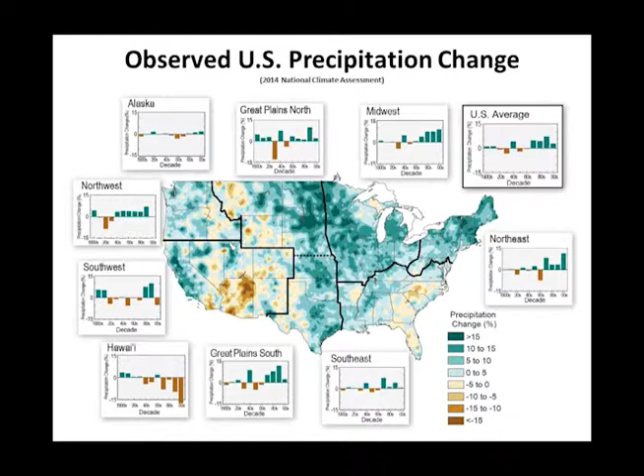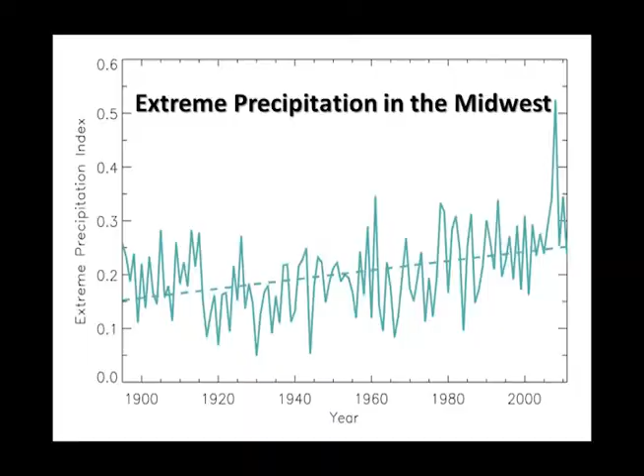The combined sewer problem is compounded by the increased amounts of precipitation that we've been seeing in many parts of this region during recent years, and the increased frequency of extreme precipitation events, especially here in the Midwest. These rainfall trends are well documented in the National Climate Assessment, and the combined sewer overflows that follow extreme precipitation events are often chronicled in the press.

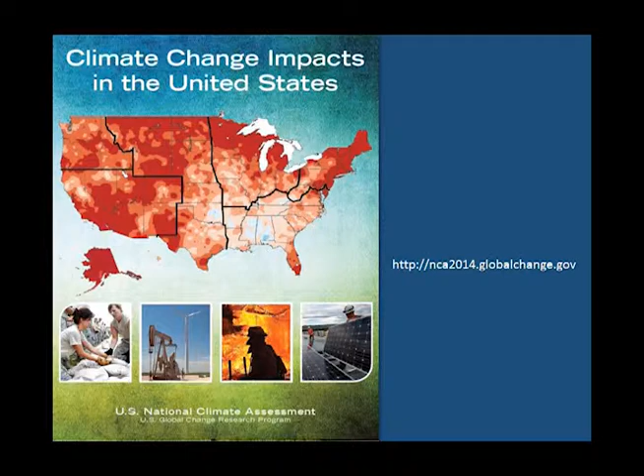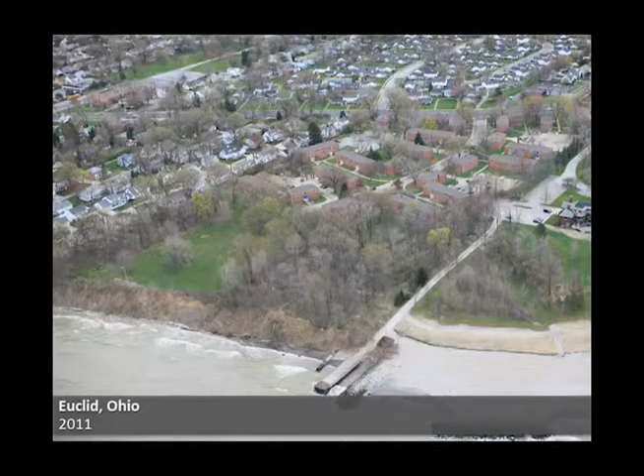Reducing combined sewer overflows is one of my top priorities, and I'm very pleased to be able to report that during the time that I've been regional administrator, we've been able to work successfully with our state and municipal partners to finalize consent decrees with 9 sanitary districts that serve CSO communities in the Great Lakes region, including Toledo, Ohio, where the city is implementing measures that will prevent the release of over 600 million gallons of untreated sewage into Lake Erie each year. In 2011, we finalized CSO consent decrees with Euclid, Ohio, and Cleveland.

The Northeast Ohio Regional Sewer District consent decree was one of the first in the country to require the use of green infrastructure, along with conventional gray infrastructure, and it will prevent nearly 5 billion gallons of untreated sewage from discharging into Lake Erie each year.

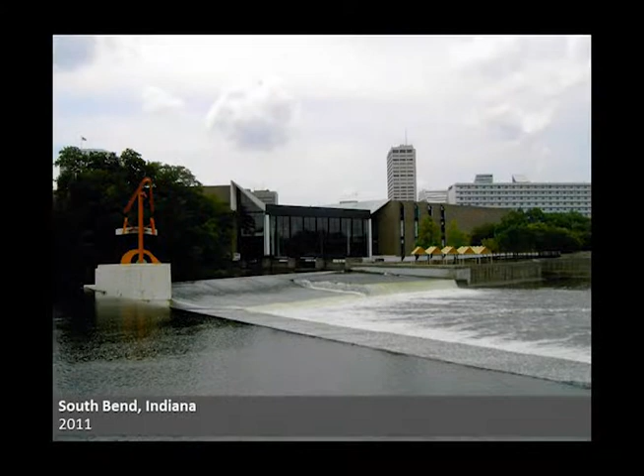In 2011, we also finalized a consent decree with South Bend, Indiana, which was followed in 2012 by a consent decree with Elkhart, Indiana, and then just last year with a consent decree with Mishawaka, Indiana, which, like South Bend and Elkhart, is located on the St. Joseph River, a major Lake Michigan tributary. There's the St. Joseph River. These three consent decrees will together eliminate an annual discharge of over 1 billion gallons of raw sewage.

In 2014, we also finalized a consent decree with the city of Akron, Ohio, which will prevent over 2 billion gallons of untreated sewage from reaching the Cuyahoga River and Lake Erie each year. And last year, we also finalized consent decrees with Lima, Ohio, and the Metropolitan Water Reclamation District of Chicago.

Here in Chicago, our CSO settlement will prevent over 200 million pounds of pollutants from entering area waterways each year. And the settlement requires the district to rapidly expand the reservoir system used to hold untreated stormwater. In fact, the consent decree requires MWRD to triple existing storage capacity for untreated water within 3 years.

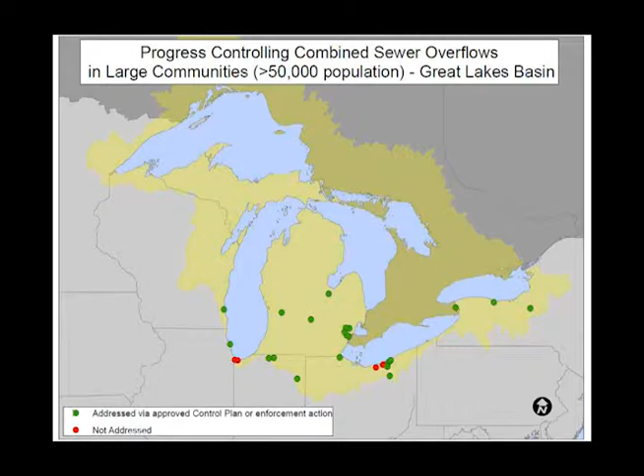That being said, there are several combined sewer communities in Region 5 where we're still working to get a consent decree in place, and most of them are in the Great Lakes Basin. These communities are highlighted by the red dots on this map. They're Gary and Hammond, Indiana, and Elyria and Lakewood, Ohio.

We're committed to finalizing consent decrees with these communities by 2016, and we'll continue to monitor implementation of all of our existing CSO consent decrees to ensure timely completion of the projects and operational measures set out in the long-term control plans that have been approved in connection with those decrees.

Green infrastructure measures, such as permeable paving and rain gardens, capture and store rain where it falls, instead of allowing stormwater to drain into overtaxed sewer systems. And because green infrastructure sometimes turns out to be more cost-effective than gray infrastructure, our recent CSO consent decrees allow communities to substitute green infrastructure for gray infrastructure projects when the community can show that green infrastructure is at least as effective as a gray stormwater management measure.

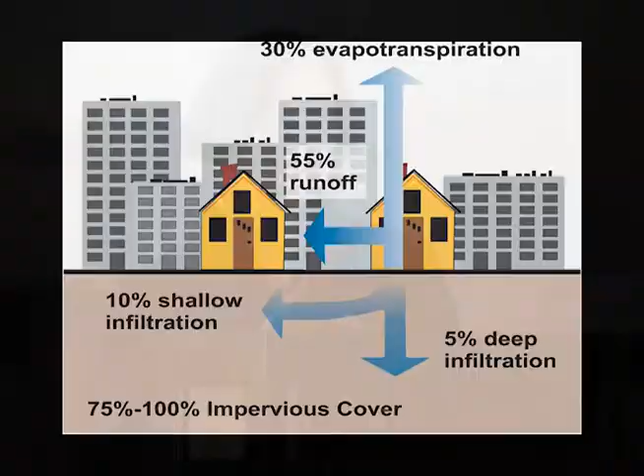To facilitate these green infrastructure improvements during the past several years, EPA has been setting aside 20% of the Clean Water State Revolving Fund capitalization grants for green infrastructure projects. I should note that green infrastructure is not just a tool that helps with combined sewer overflow problems. These projects also produce other benefits, such as creating parkland, reducing urban heat island effects, and preventing urban runoff, which is a significant source of water pollution in densely populated areas along the Great Lakes.

The new EPA Water Infrastructure and Resiliency Finance Center will serve as a resource for communities seeking to improve wastewater, drinking water, and stormwater infrastructure by developing new innovative financing models, including public-private partnerships, to better leverage federal funding to increase investment in the water sector. Just last week, EPA brought on a new senior advisor to stand up this new center, Jim Gebhardt, who served for over 20 years as Chief Financial Officer of the New York State Environmental Facilities Corporation.

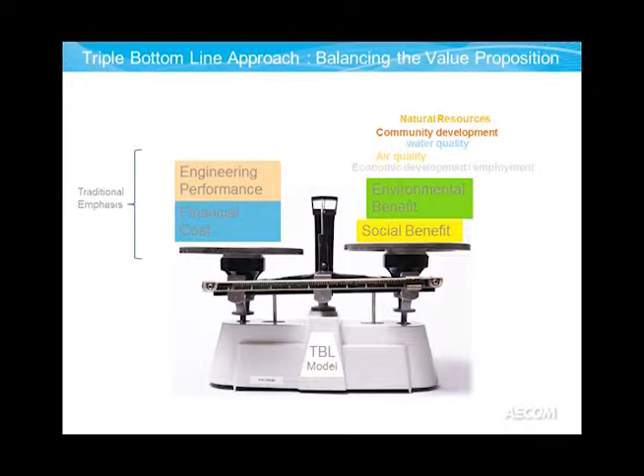Now I'm going to flip totally to a different discussion, and that is really about triple bottom line analysis. It's something that we've been doing for the San Francisco Public Utilities Commission and elsewhere. Triple bottom line analysis is basically taking the concept that we used to do as engineers, just looking at performance and costs, and only looking at that side to figure out which projects we should choose. Now we're incorporating the societal and environmental consequences in tandem with those performance and cost questions. And so there are a number of cities around the country that are doing this: Portland, Cincinnati, Melbourne, well, Melbourne's in Australia, New York, and San Francisco as well.

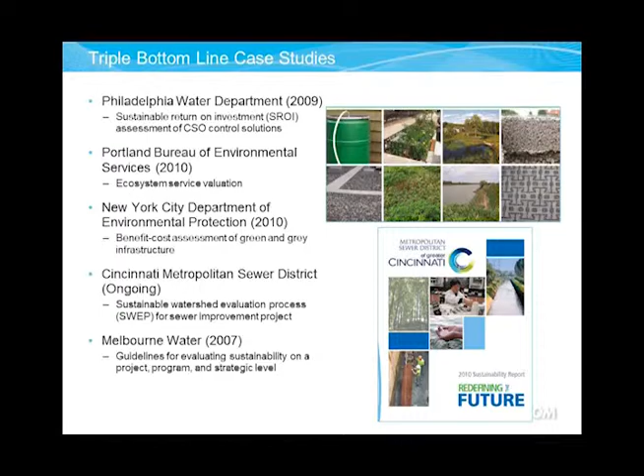They're all doing different forms of evaluations that account for that societal and environmental consequence in addition to just what's the price and what does it do. And in San Francisco Public Utilities Commission, we were faced with significant problems in terms of aging infrastructure. We have sea level rise already, believe it or not. We have king tide events that reach in and push the water back, so that the drainage goes back into the cities, and you have manholes that explode. And the result is that you've got combined sewer overflow in certain locations.

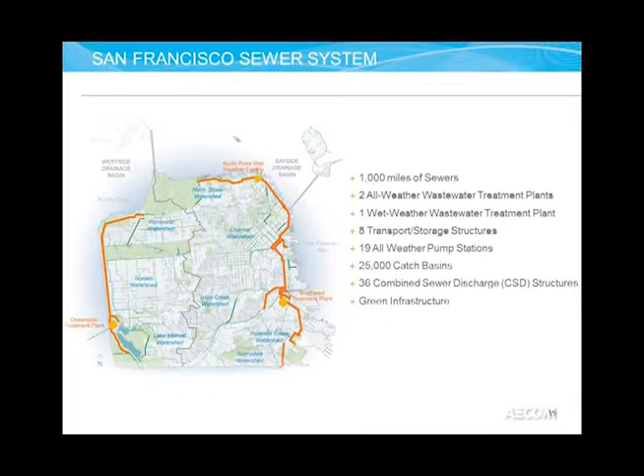Those orange boxes are essentially the storage tanks. So when the water flows down from the hillsides, it stores there, and we try to hold it as long as we can and treat it. But when there's a major rainstorm, like a 5-year event, that flows right into the bay and into the Pacific Ocean. So we have a series of things that we have to achieve, and they have basically said we have a $6.8 billion capital initiative over the next 15 years to help fix the system and reduce the problem.

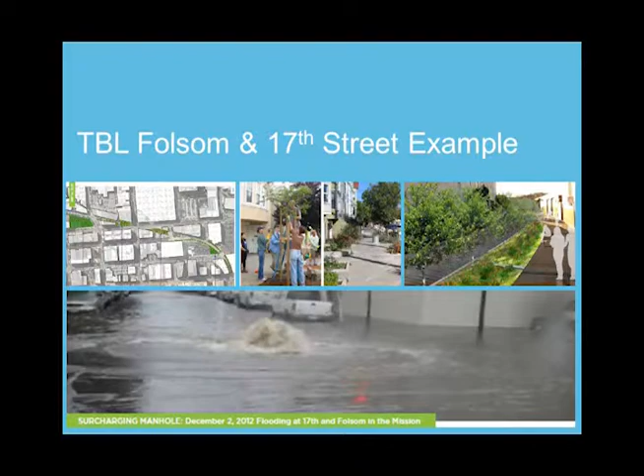So I'll give you an example. This is at Folsom and 17th Street in San Francisco. You do not step in that water. That's actually a combined sewer and stormwater event. I would recommend not stepping in puddles in San Francisco on a general basis because you will find things in there. It's about 4 blocks from Mark Zuckerberg's house, and it's something that they want to fix. So they were looking at possible opportunities.

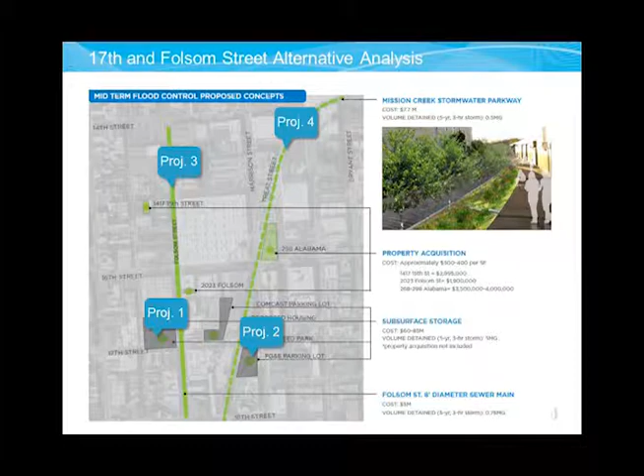Project 1. That's a trick question, actually. So yes, Project 1 is typically what we recommended. It has all sorts of associated co-benefits. It includes adding additional recreation space in an area of need. It adds bicycle and pedestrian improvements to that site and improves water quality. It has additional ecological benefits associated with that project.

So what we're showing is the consequences of our investments, but not necessarily putting any value judgment of which one is better than most. And what's critical about this is that is a political decision, that is not a staff decision. So just in terms of when you do these evaluations, it's critical to think about that in terms of what license you take and how do you describe your consequences of your investments.

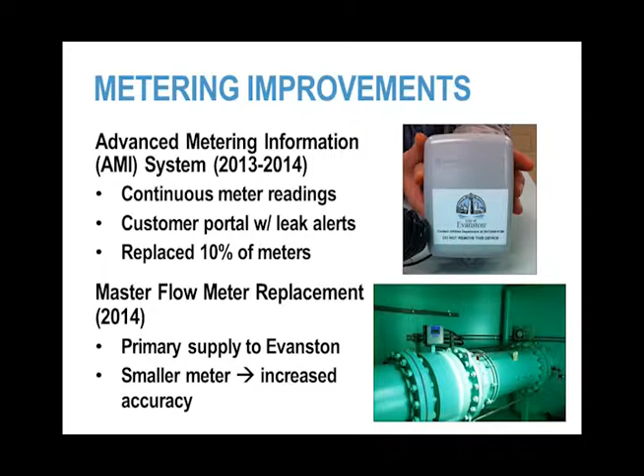The other thing that we spent money on was to replace the master meter leaving our water treatment facility. It was a 48-inch Venturi meter that had been installed some 50 to 60 years ago, and during the winter time we have relatively low flows going through that Venturi, so we're at the edge of its accuracy reading, so we replaced that Venturi with a 24-inch mag meter so we can get all those lower flows accurately registered and make sure that we aren't saying we're delivering more water to the distribution system than what we really are.

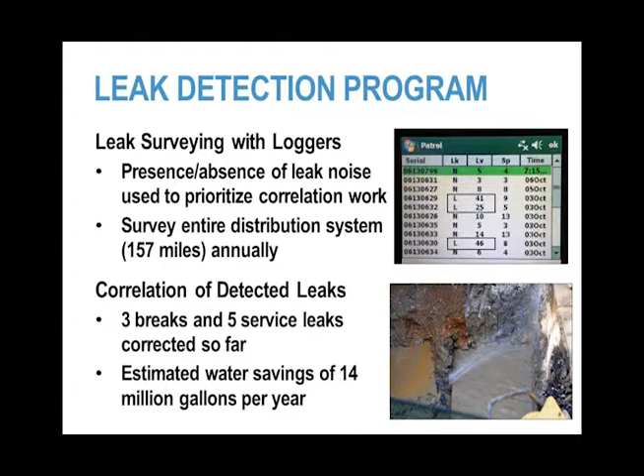The next tool that we use were leak loggers. I'm not certain how long they've been out there, but they're certainly more readily available right now. And in comparison to a correlator to listen for leaks, these leak loggers are very small. You can hold them in your hand. They readily fit into valve vaults or valve boxes. And we have about 30 of them in our municipality, and we can go around and set them in different valve structures.

And then these loggers come on at 3 o'clock in the morning, and they listen for 5 minutes for a noise. If they don't detect one, they just shut off. If they hear a noise, they turn on again at 4 o'clock in the morning and listen for another 5 minutes. If they hear the noise the second time, then they go into the leak indication. And then we would have to go out with our correlating equipment, which is more time-consuming. You have to stay with your equipment while you're doing this. And that's when you actually pinpoint your leaks.

We bought this equipment at the end of 1 year, and we were able to do a third of our city, and then the following year, we were able to do the other 2/3 of the city. This is our third year. We intend to do the entire city, 157 miles, within 1 year. When we first started doing this, we found 3 main breaks and 5 leaks on water services that we had corrected, and we believe that we have stopped 14 million gallons of water annually being wasted through these leaks that were not surfacing to the street and readily identifiable.

Another major challenge for Evanston that's impacted by this regulation is that 91 miles of our 157 miles, or 58%, is more than 80 years old. And the construction of water mains back at that time was cast iron pipe with lead caulk joints. They had an allowable leakage rate when they were installed, and those type of joints leak. There's not much that you can do to prevent that.

We select which mains to replace based on the number of breaks that water main has had. So we have a nice CMMS system that we're recording all this data in. And then it spits out to us which mains we should replace. We also look at if hydraulic improvement is needed in that area, or if the street's being resurfaced. Those are kind of the trifecta. If you can get a main with a lot of breaks that should be upsized and we're paving the street, we do those obviously first.

But the newer technology allows us to also potentially line water mains using the CIPP process, something that's been done in sewer mains for a long time. It's becoming more recognized in water mains at this point in time. Last year was our first endeavor with this. We lined a 6-inch water main, a water main that was approximately 80 years old. You can see how corroded it was inside of it, and you can see the finished product after it being lined.

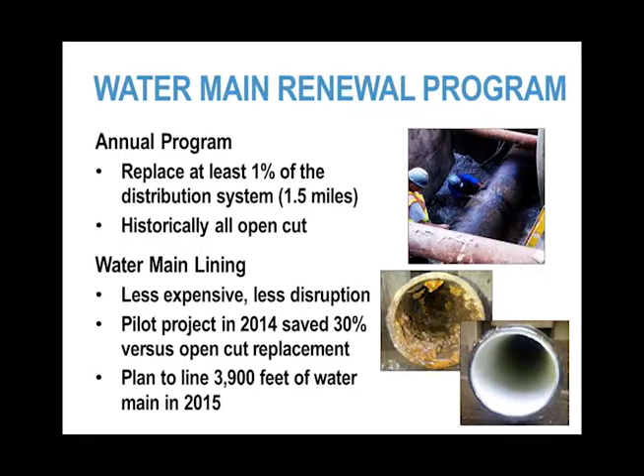There were water services on this water main. It was a residential street that we were on, and it became successful, and the cost is actually about 1/3 less than replacing the water main. So with that same $3.5 million, if we can line the water main, we expect to be able to get more than 1.5 miles accomplished in a year.

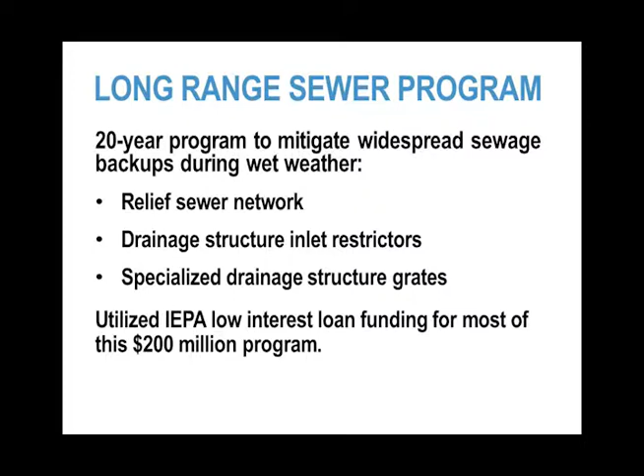Another project I would like to talk about is Evanston's long-range sewer project. We're one of those older communities that have a combined sewer system. It is vastly undersized, and that's been known since the 1930s when the Public Works Director back then declared that. Not much was done really to improve that situation until August 13th of 1987, when the Chicagoland area had over 9 inches of rain in 24 hours, and all of our basements in Evanston were filled with approximately 7 feet of sewage water. And that's when the City Council decided to take action.

We put out a proposal, and we received a very unique design plan from Harza Engineering, now called MWH Americas. And that was a partial separation, and that made our ability to change the system much more feasible. It's a relief sewer system, so it's not just a storm sewer system, it's interconnected with our combined sewer. So if the combined sewer does overflow, it can fall into our relief sewer system.

The unique part was that we put restrictors in drainage structures so we didn't have to put the new sewer system on every street in Evanston. We put them on downhill streets, if you will, and we put inlet restrictors in the other structures that were still connected to the combined sewer that limit the amount of stormwater going into the combined sewer system. And then just even some final details is making sure that you use the correct drainage structure grates.

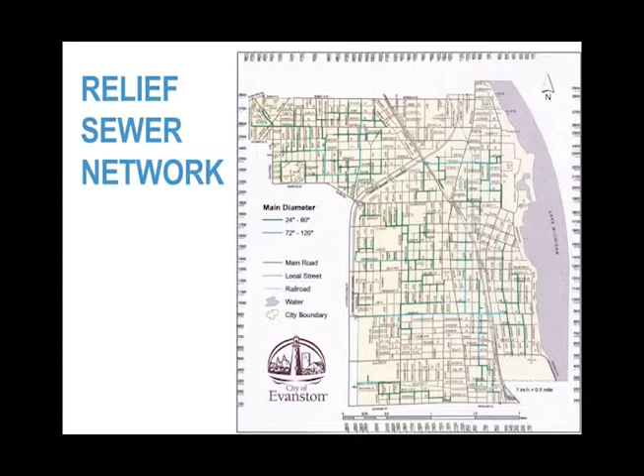This next map is somewhat hard to read. The lighter blue is an indication of where we put in about 8.5 miles of 72 to 120 inch tunnels that were 60 feet deep. And then we also put in 35 miles of 24 to 60 inch diameter pipe shown as the darker green lines up there. So this is our relief sewer system. We connect to the Metropolitan Water Reclamation District's deep tunnel. It was a great endeavor for Evanston to be able to have somewhere where we could discharge our sewer to. We wouldn't be able to do what we have done without the district.

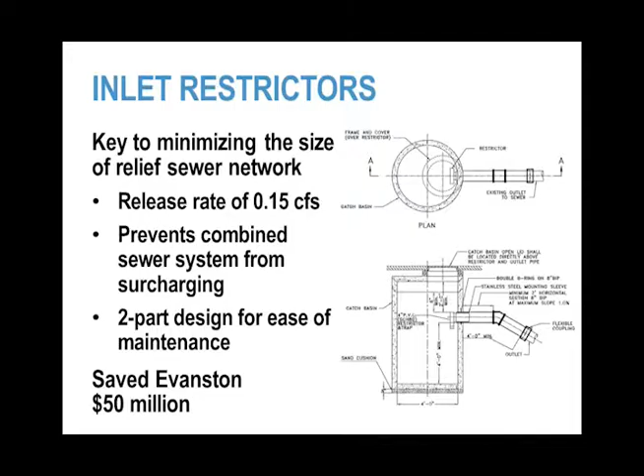The restrictors are placed in the drainage structures. These details might be a little bit hard to see, but that's a catch basin drainage structure. And then the outfall pipe, we put in a stainless steel device that creates a vortex as the stormwater leaves through that. It's a two-part system that we can pull the vortex head off of the pipe that slides inside the outfall pipe.

So for maintenance, these do get plugged up, but it has not been a maintenance nightmare. A crushed pop can fits really well into that vortex valve, but because we're able to hook it and pull it up to the street level after the rain event is over and clean it out and put it back in relatively easy, it's not been too hard for us to handle.

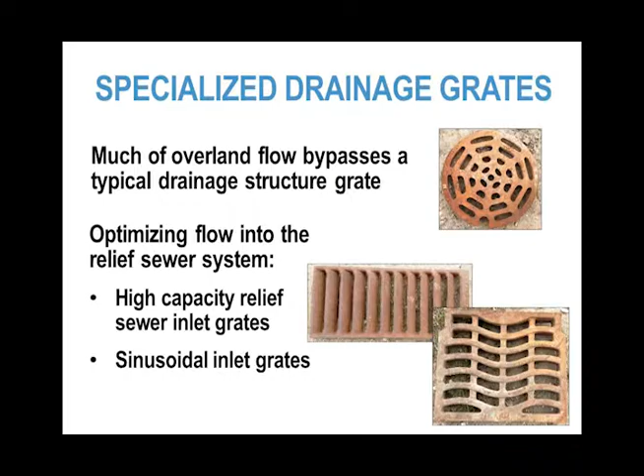The picture at the bottom are grates that East Jordan Iron Works worked with us on, and Neenah Foundry as well, but they're vaned grates, so as the water flows over it, it's actually pulled into the drainage structure, or sinusoidal grate with the different shape in it that also kind of disrupts the flow of the water down the curb line and lets the water go into the drainage structure. And with that, I'm at the end of my presentation.

Is this on? Okay, I'm going to kick off our discussion with a couple of questions.

So Susan talked about some of the incredible infrastructure investments that are happening here in Region 5, and actually Metropolitan Water Reclamation District and also Northeast Ohio Regional Sewer District are both part of the Value of Water Coalition. And I have to say that yesterday I was in Cleveland, and we were highlighting for media and the elected officials in the region some of those investments.

We actually took a crew of people 240 feet down into the pump station that's being developed that is going to ultimately, when it's up and running, lead to billions of gallons of sewage not going into Lake Erie. So I just wanted to let you know that it is going well in Cleveland, and it was so cool to be underground to see that.

But those investments that are being made in Region 5 and really around the country are 98% financed by local ratepayers. It's really quite different than in transportation, where we have a much bigger federal investment being made. And actually, when I was in San Francisco, I led the effort for a 9% rate increase compounding every year for the next 5 years to do some of those projects that Quinn just talked about.